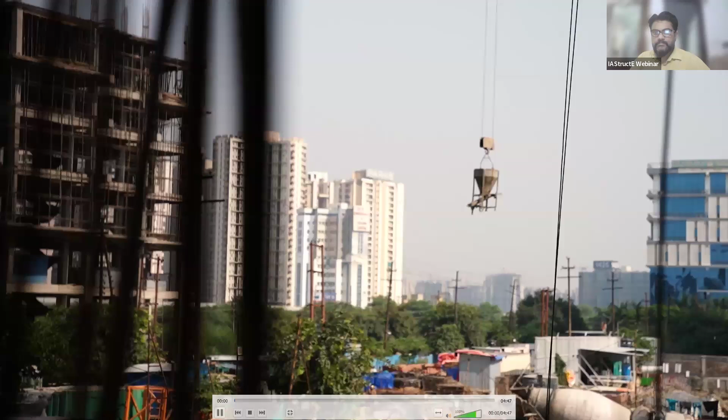The Indian Association of Structural Engineers, also known as IAStructE, was conceptualized and constituted in the year 2002 by a group of senior professional structural engineers from all over the country. IAStructE is registered under the Societies Registration Act 21 of 1860.

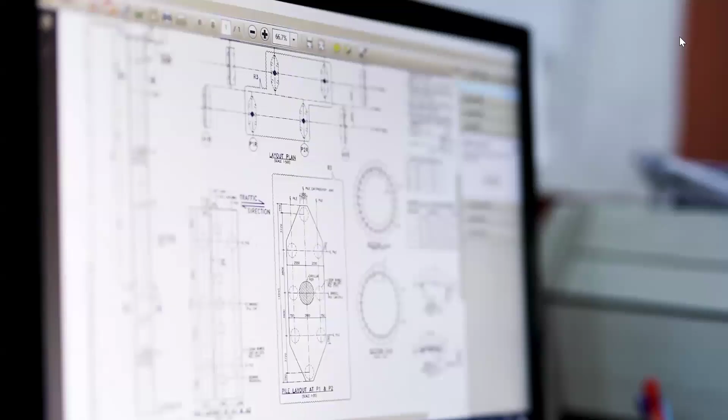IAStructE is a national apex body of structural engineers in India with a mission to promote the structural engineering profession and cater to the professional needs of the structural fraternity. In the short span of two decades, the association has attained an eminent position in the professional field. Its membership is valued very highly in the profession.

Since inception, IAStructE has been led by eminent structural engineers like late Shri Mahendra Raj, late Shri Kumar Ghosh, Shri Subhash Chand Mehrotra, Professor Mahesh Tandon, Shri Alok Bhaumik, Shri Manoj Mittal, and Professor R. Pradeep Kumar as its president.

IAStructE is a permanent member of the Engineering Council of India and interacts with the government on professional and policy matters related to civil and structural engineers. To expand its reach, IAStructE has collaboration with various international professional like-minded associations and institutions.

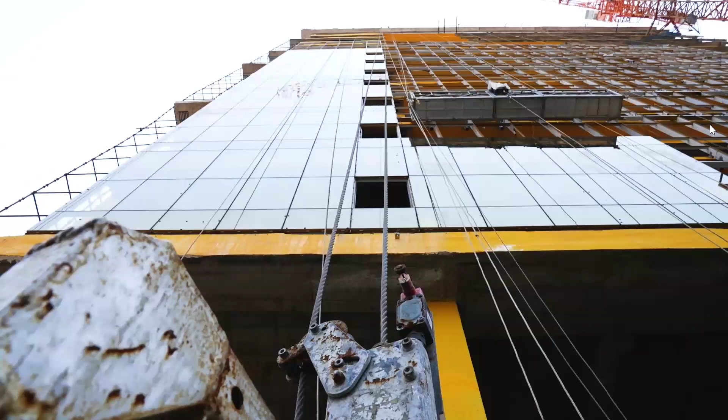IAStructE's prime objective is supporting and protecting the profession of structural engineering by upholding professional standards and acting as a mouthpiece for structural engineers in India. IAStructE endeavors to ensure that its members develop the necessary skills in structural engineering and work to the highest standards by maintaining a commitment to professional ethics and standards.

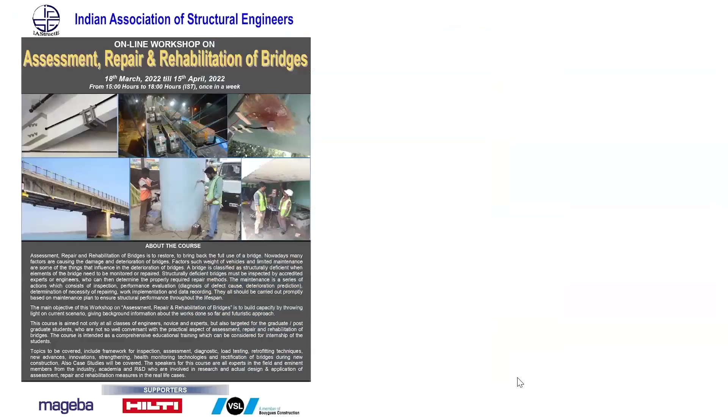IAStructE is actively engaged in organizing several continuing professional development courses for structural engineers to help them update their knowledge and advance their career paths. It also conducts refresher courses for young and practicing engineers, and student-oriented programs, seminars, workshops, conferences, technical lectures and discussions related to the latest technological advancements. Case studies are also organized regularly for members to enable them to continuously update their knowledge and skill set by interacting with the best minds from the industry.

IAStructE's activities are widely appreciated and known for quality technical content. IAStructE is also actively engaged in publishing its quarterly journal Structural Engineering Digest (SED), code commentaries, professional guidelines, and a monthly newsletter. IAStructE's publications are becoming popular with time.

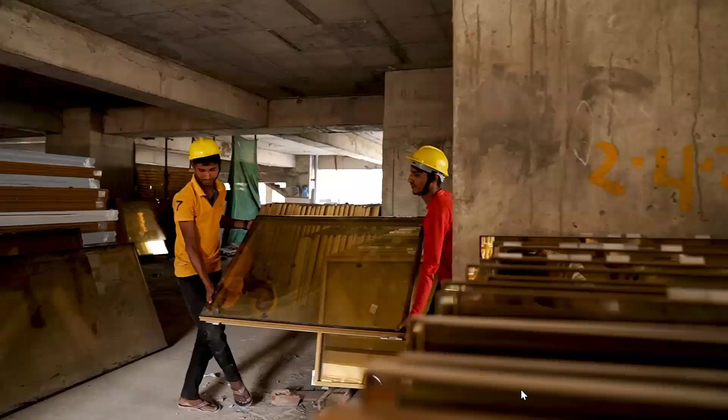IAStructE has representation in various technical committees of BIS and IRC as well. Its members are actively contributing to National Code Formulations.

In the year 2020, IAStructE started a National Awards competition to stimulate interest in the structural engineering field and to promote innovative thinking and creativity. The awards are presented to winners in recognition of their outstanding contribution to structural engineering in categories which include Outstanding Structure, Outstanding Structural Engineer, Outstanding Woman Structural Engineer, Promising Young Structural Engineer, and Best Master's Thesis in Structural Engineering.

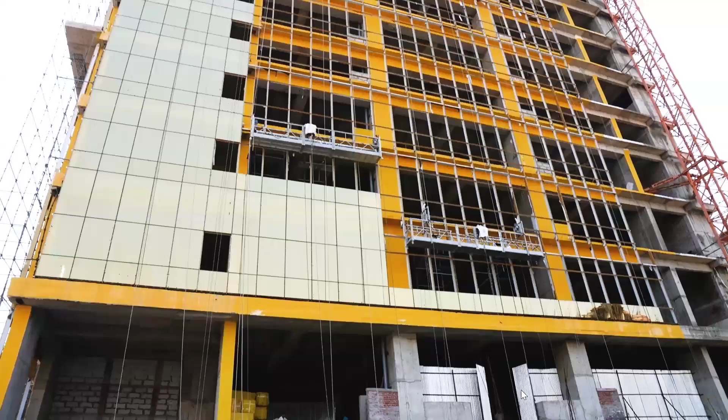IAStructE is currently operating from four regional centers, namely Eastern, Western, Northern, and Southern, having its headquarters in Delhi, to inculcate the professional culture and provide handholding to budding engineers. IAStructE has its student chapters in several leading engineering institutions as well.

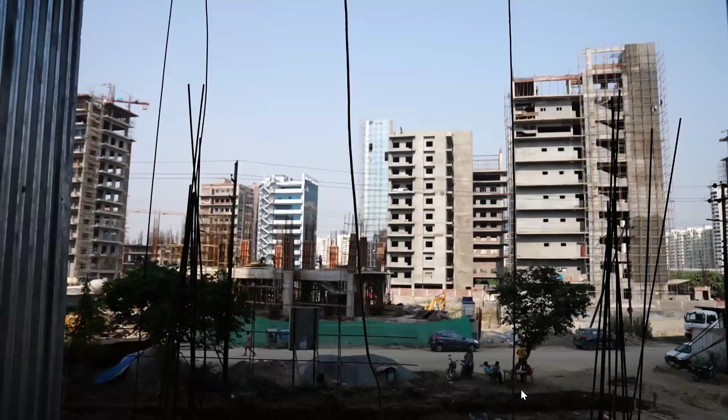Membership of IAStructE is open to all civil and structural engineers engaged in the structural engineering profession. Members are elected based on their qualifications and experience in different grades, as per eligibility requirements prescribed in the bylaws. Each application is carefully scrutinized before electing the members.

More information about IA Struct E is available on its website, www.iastructe.co.in.

Hello. Yes, sir. Yes, sir. Please start.

Okay, dear friends, welcome to the participants attending this webinar. Today's topic is essentials of effective waterproofing. The speaker is Engineer K.P. Abraham. On behalf of the association, I thank Engineer Abraham for sparing his valuable time, and he will talk on the topic essentials of effective waterproofing.

About the speaker, Engineer K.P. Abraham, former Chief Engineer CPWD, graduated in civil engineering from Kerala University and thereafter did his MTech from IIT Kanpur in structural engineering. He also holds a postgraduate diploma in management. After working for two years in Tata Steel, he joined CPWD in 1982.

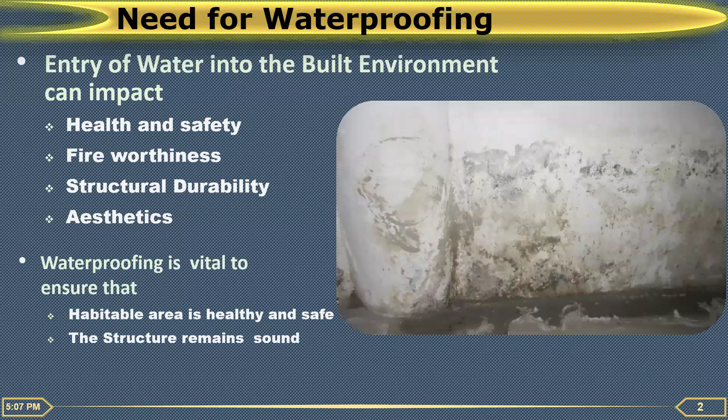So waterproofing is an essential element, and it is vital to make sure that your habitable area is healthy and safe, and the structure remains sound, and your architectural aesthetics is maintained throughout the life period or the service life of the building. And there are many avenues for the water to enter into the concrete.

You all know water is a material that looks for avenues to enter, and concrete offers a large number of avenues for water to enter. It can permeate through capillary pores in the concrete. It can enter through cracks in the concrete. It can enter through joints and discontinuities in the concrete. It can enter through insertions, which we normally make in any concrete construction.

And finally, it can enter through defects. Indian construction industry is famous for defects - could be honeycombs, surface defects, voids, it can be anything. So there are many ways for water to enter into the concrete.

First is the pores. Let us see one by one which are the avenues. When cement hydrates, two types of pores are created. One is gel pores, very small in size, which will not create water ingress or permeability. But the capillary pores, much higher in size, will certainly allow water to enter, and these capillary pores make the concrete permeable.

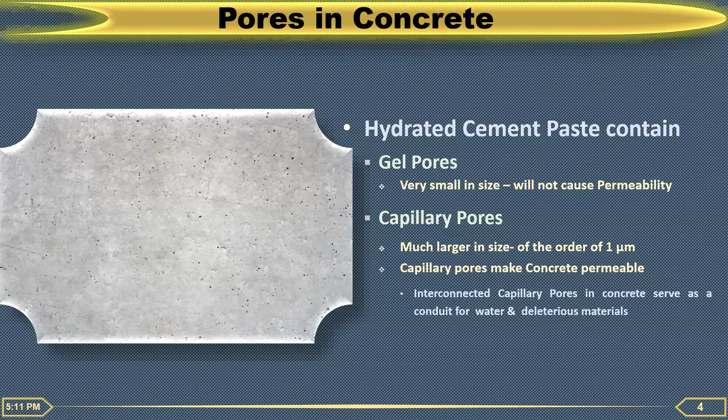And when the capillary pores are interconnected, they act as a conduit for water and deleterious material to enter into the concrete. The relation between porosity and permeability of concrete - as porosity increases, permeability increases, but it is not a straight relation. Its relation is a very interesting one.

On the horizontal side is the capillary porosity in percentage, that is the voids as a percentage of the concrete volume. Then the coefficient of permeability, which is the velocity or speed at which water can enter the medium. This relationship is somewhat like this: beyond a certain stage, the permeability increases drastically, increasing asymptotically.

Around 20% of the porosity, the concrete is practically impermeable - you can consider it as impermeable. But beyond 20%, once porosity increases, permeability drastically increases, and around 35%, the concrete is practically a porous material.

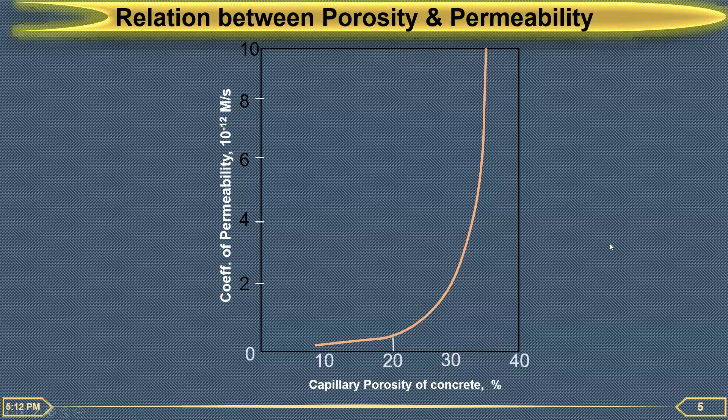Now, cracks in concrete. We all know why concrete cracks. Concrete cracks - it is an inherent nature of the concrete. We cannot avoid it, but we can certainly control it. It's an inherent property of the concrete to crack, and it cracks at all stages of its existence - it could be in plastic stage, hardening stage, or hardened stage.

So why does it crack at the hardened stage? Because concrete is a brittle material, and the tensile strength of concrete is very low compared to its compressive strength - we all know that. Whenever tensile stress develops in the concrete, and whenever it goes beyond the tensile strength of concrete, it cracks. This is why concrete cracks, and it's an inherent nature of concrete to crack.

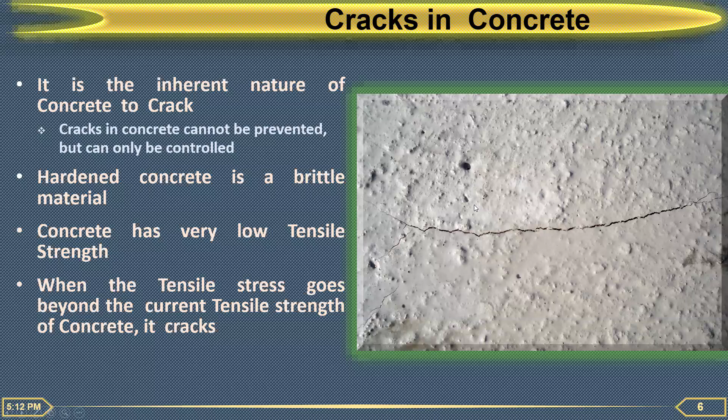Cracks in concrete can be many types, but basically we can categorize them into structural cracks and non-structural cracks. Structural cracks can be dealt with at the design stage itself - through proper detailing or proper design factors, or it can be taken into account by various methods. The designer can take care of it.

But non-structural cracks cannot be taken care of at the design stage - it has to be taken care of at the construction stage. There are many non-structural cracks that happen in concrete.

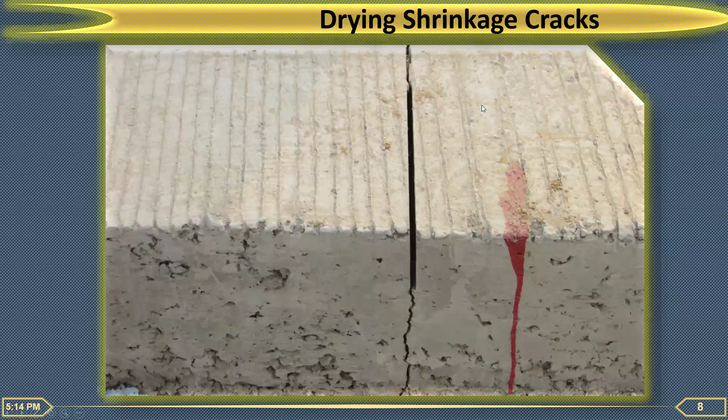The next category is the drying shrinkage cracks, and then thermal cracks. A typical drying shrinkage crack is a through and through crack - it will certainly allow water to enter into the structure. Thermal cracks are due to variation in the surrounding atmospheric temperature.

If the structure is allowed to move without any restraint, there is no crack. But all structures have some restraint or other always. So whenever the temperature goes down - it mainly happens when temperature goes down, not up - or when there is a temperature differential within the section, tensile stresses will be developed. This tensile stress will be proportional to the restrained strain - how much strain is restrained. And again, whenever the induced tensile stress goes beyond the tensile strength of concrete, it cracks.

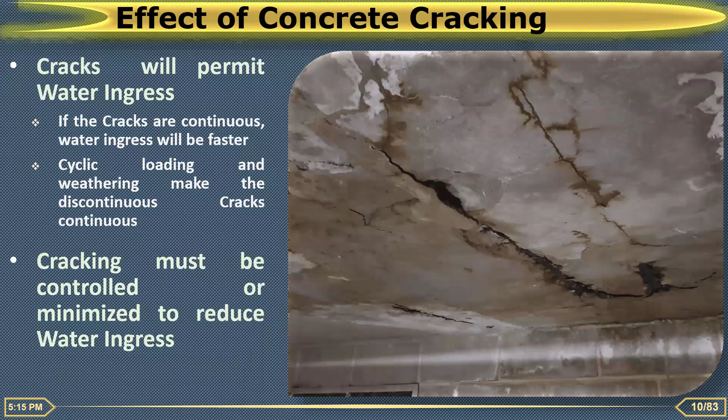Now, what is the effect of concrete cracking? Cracks will certainly permit water ingress, and if the crack is continuous, the ingress will be faster. Cyclic loading and weathering make discontinuous cracks continuous. So over time, be it weathering, loading, or fatigue, the crack will only widen once it develops. So cracks must be controlled or minimized to reduce water ingress into the structure.

Now, there are many joints in concrete. No major concrete can be done without joints. We know why we give the joints. Joints are given for different purposes, and there are many purposes for which joints are given.

First of all, we have contraction joints. This is to take care of the contraction while setting and hardening. Then we have construction joints. No concrete can be done continuously. Somewhere or other, we have to stop, and when we restart after its final setting time, a cold joint will be developed. That is a construction joint.

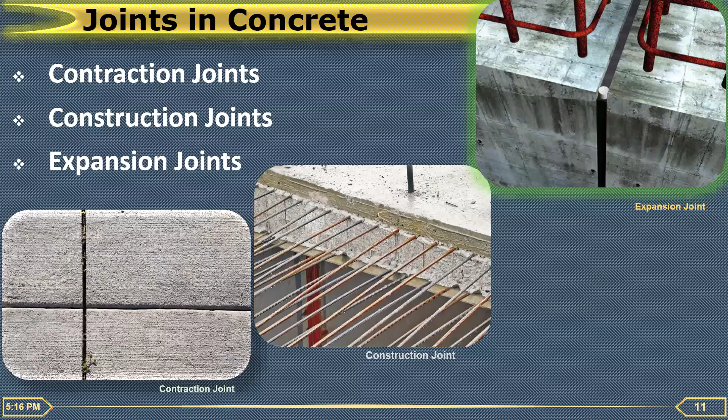Then, of course, there will be expansion joints. No major structure can be done without joints. These joints are required not only for thermal expansion, but also to take care of the seismic behavior of the structure. So all the joints in a structure have to be treated to prevent the ingress of water into the built environment.

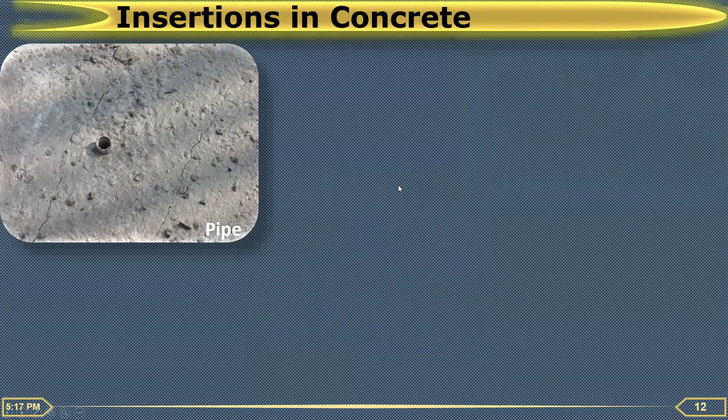Now we do a lot of insertions in concrete. No major concrete is done without insertion. There could be pipes—you can see the pipe inserted here. There could be sleeves inserted into the concrete, and you can see a hole here. And it's a very interesting thing—a hole is made in the raft, and the raft is...

...against the water thrust. The water table is very high. And you can just imagine, whatever treatment you give below the raft, if this cutout is not treated, it is going to leak somewhere or the other. That is the criticality of this type of insertion and cutouts.

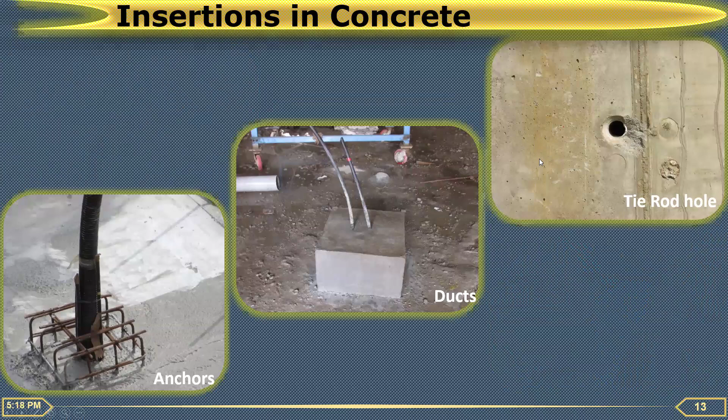Now we put anchors into the concrete, we put ducts into the concrete. You see it's a tie rod hole. This is basically provided for retaining the shutter at the concreting stage. All this creates subsequent leakages if not properly treated.

Now, let us see what are the reasons for failure of waterproofing treatments. With all the care we take, still it fails. What are the reasons? What could be the reasons?

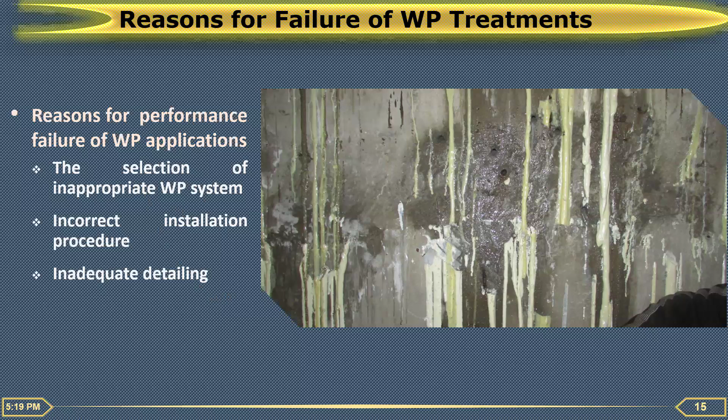So let us come to what are the essential requirements to make your waterproofing successful or effective. I will go one by one.

First of all, ensure high performance of the concrete against water ingress. Make sure that your concrete is high performance against water ingress.

Then select an appropriate waterproofing system. It's very important. A wrong system will lead you to a lot of problems and headache at a subsequent date.

Then, of course, your applicator should be competent and experienced. An incompetent applicator can spoil the whole thing.

And finally, test the completed waterproofing, which we never do. We only test the components or a part of it. We never test it after installation as a completed waterproofing. This is also very important. These are the factors we have to consider to make your waterproofing good.

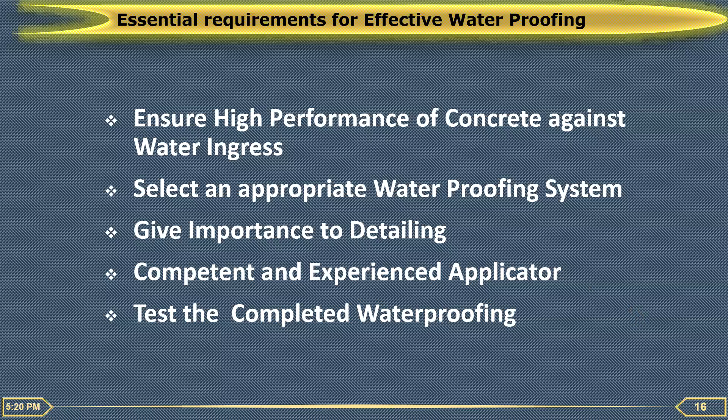I will elaborate some of this situation to make it more clear. First of all, let me explain the importance of selecting an appropriate waterproofing system. This is one of the crucial aspects in the success of waterproofing of the building.

I'll explain the need for selecting an appropriate waterproofing system with the system we adopted for this particular project. So this is a huge complex. It has got 3 basements covering the entire buildable area, and it is very near to River Yamuna, and the water table is very high.

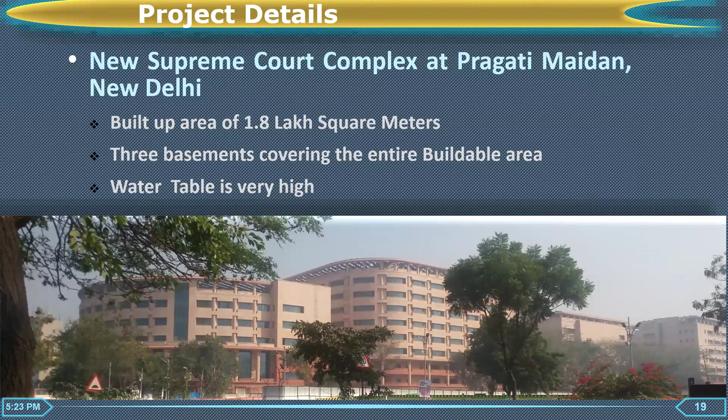The raft level is around 15 meters below ground level. Water table is about 2.5 meters below ground level. You can imagine the building is subjected to an upward thrust of 12.5 meters of water head throughout its life period. So we had to be careful in planning and executing the waterproofing treatment of such a structure. Moreover, you can understand the implication of failure here.

This is the details. The basement is here. This basement covers the entire buildable area permitted for the plot. Over that, different blocks and different towers exist. Wherever towers are not existing, they are used as a podium, maybe for parking or for garden.

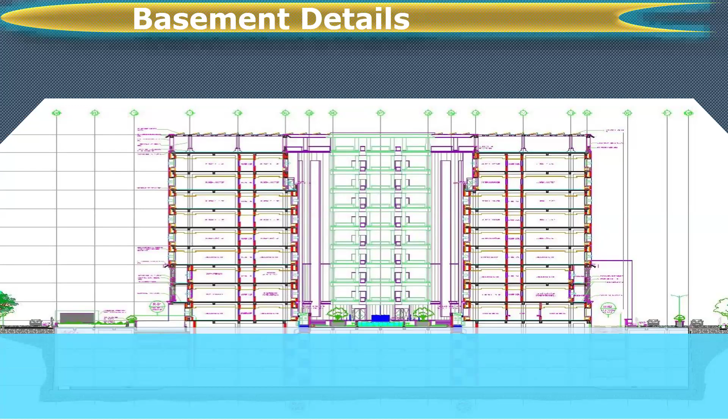So water table is practically near the ground, say around 2 or 2.5 meters below ground level. This basement has to be treated effectively so that subsequently there should not be any major headache or problems. This basement, in addition to parking, has all vital installations of the structure - be it electrical installations, firefighting installations, or air conditioning plants - all require an absolutely dry surface for proper upkeep and maintenance.

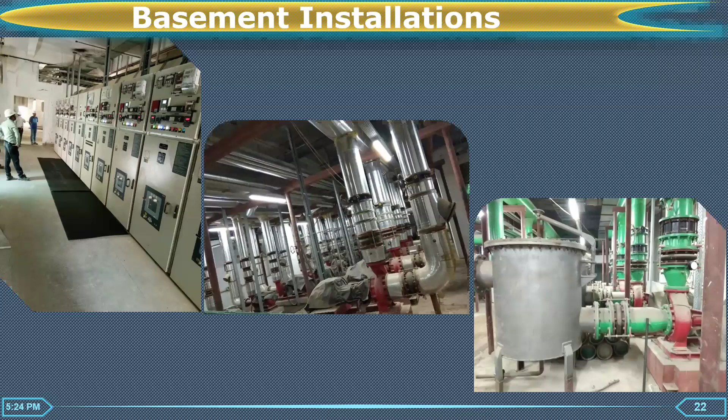And the problem is complicated by the presence of soil anchors. There is an uplift of 12.5 meter head of water throughout the life of the structure, and the building has to be held down against buoyancy. Soil anchors are provided to hold down the structure against buoyancy, against the uplift forces.

So we have provided soil anchors of different capacity. The spacing was provided differently - at the tower area, the spacing was more; in the non-tower area, it is closer because the effective uplift will be more in the non-tower area. Note that these soil anchors pass through the raft, meaning it punctures through the raft, and these are prestressed and anchored at the top of the raft.

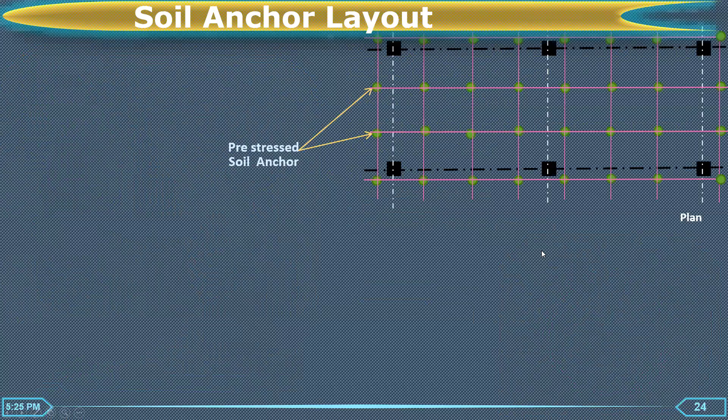What was initially considered as the waterproofing system is the typical Kota stone system, a traditional system we adopt mainly in Delhi and surrounding areas. It has withstood the test of time and in most cases worked well. I am not finding any fault with this system. Many important buildings were provided with this Kota system.

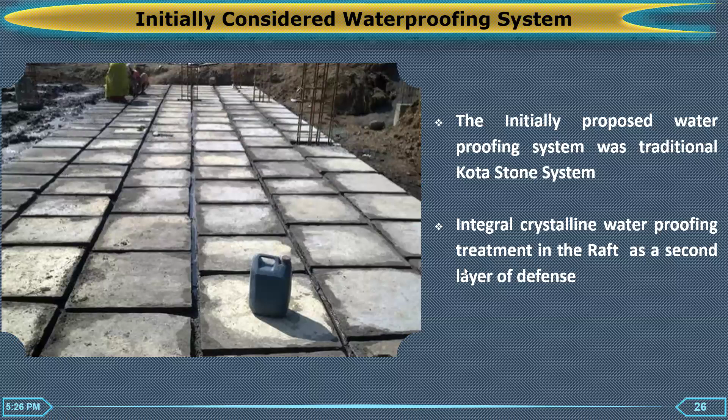As a second layer of defense, crystalline waterproofing treatment was given to the raft, so that there's something to resist even if the Kota stone fails. This is the initially considered waterproofing system for the project.

But we made an analysis of whether it will work, whether it can create any problems. First of all, we observed that Kota stone is a rigid system, like any stone is rigid. There is a very possibility that the stone will crack or the joints will crack while stressing the soil anchors, so every possibility is that it gets cracked. Once the Kota stone is cracked or the joint is cracked, this treatment is of no use.

Secondly, it's a vast area of the raft, covering more than 8 acres of land, and there could possibly be local settlement of soil below the raft. If a local settlement happens, the Kota stone will detach or separate from the bottom of the raft, again allowing water to enter. It can travel vertically through the raft or horizontally between the raft and the stone, leading to leakage somewhere else, and at a subsequent date it is very difficult to know the source of the leakage.

And finally, the soil anchor and raft interface will be extremely difficult to waterproof with the Kota stone. We cannot make a foolproof waterproofing treatment of the interface of the soil anchor and the raft.

So we evaluated the requirements for a successful waterproofing system here. First of all, the material should be flexible; it should not crack under the pre-stressing load of soil anchors, the prime criteria. Secondly, it should not separate from the structural concrete in the event of a local settlement of the soil. It should stick to the raft.

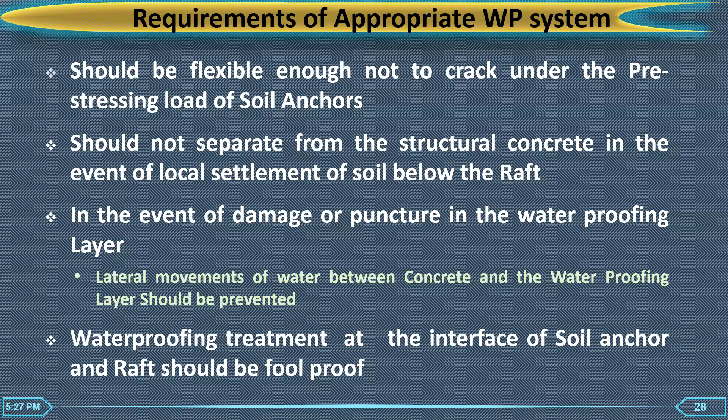Thirdly, in the event of damage or puncture of the material, any layer or sheet can get damaged or punctured while laying it. In that event, water should not travel laterally between the concrete and the waterproofing layer. They should not allow movement of water at the interface of concrete and the sheet. And finally, the waterproofing treatment at the interface of soil anchor and raft should be foolproof. We should get a foolproof system of waterproofing the interface of the anchorage.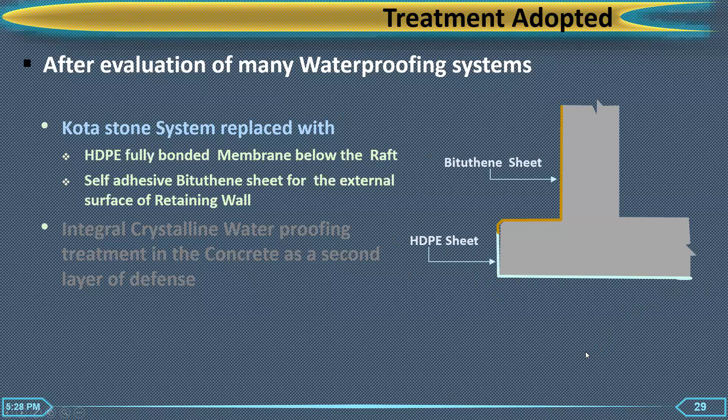So after evaluation of many waterproofing systems, we finally decided to replace the Kota stone system with an HDPE fully bonded membrane below the raft and a self-adhesive Bituthene sheet on the external face of the retaining wall. You can see here the HDPE sheet is provided below the raft and Bituthene sheet is provided on the vertical side. And as a second layer of defense, we retained the integral crystalline waterproofing treatment in the concrete of the raft.

This is what we finally adopted. These are the details here. The HDPE fully bonded sheet can be easily creased or bent 90 degrees without damage to the vertical face, so that there is no discontinuity at the corner.

On the vertical face, we are given a thin sheet which properly overlaps at the vertical face of the raft. This HDPE sheet has an interesting behavior: it has a pressure sensitive adhesive which bonds integrally with the concrete poured over it. That was a great advantage for us. Once it is bonded, lateral movement of water can be certainly avoided.

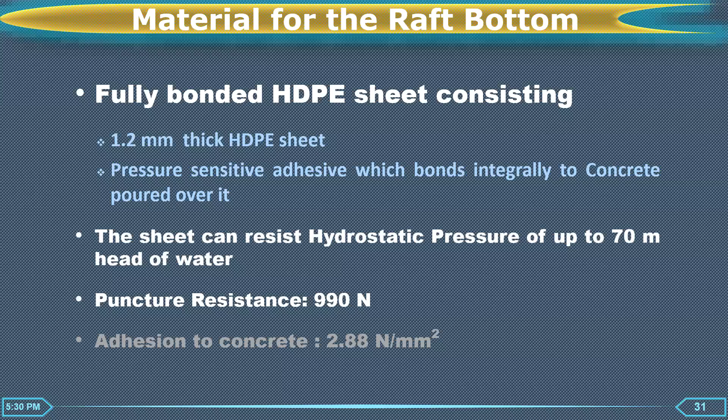Then it has other major technical parameters provided by the manufacturers. Initially, we were also apprehensive about whether green concrete placed over the sheet would really bond with the sheet.

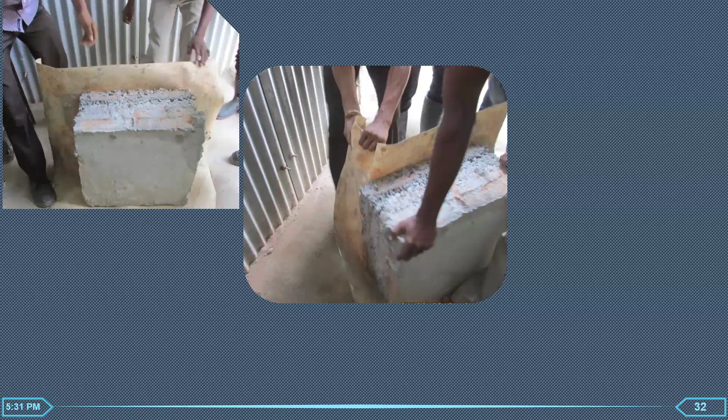No testing parameters were available a few years back, so as our own interest, we made a cube over the sheet. After curing and hardening, we tried to detach the sheet, and certainly with manual labor it was not possible to detach it, showing that there is enough bonding between the concrete and the sheet, so that the horizontal transmission of water could be avoided.

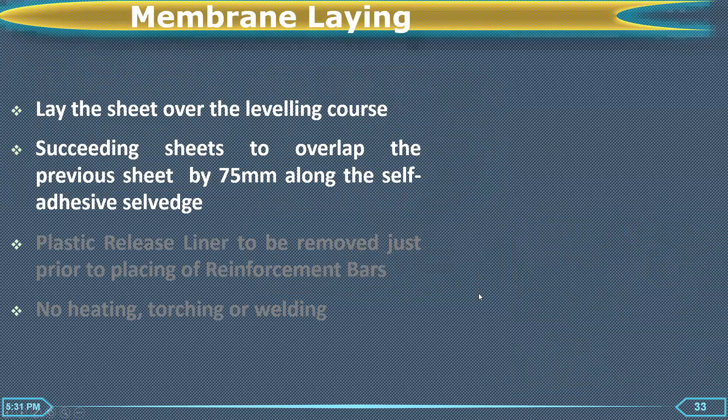The laying was also comparatively easy. It is laid over the leveling course, that is lean concrete. The sheets are laid with an overlap of 75 mm, and after laying, a plastic release liner is removed and the reinforcement is placed over that. You can see the overlap of the sheets. Here the main advantage was that there is no heating, no torching, no welding - it is only simply laying and sealing the joints.

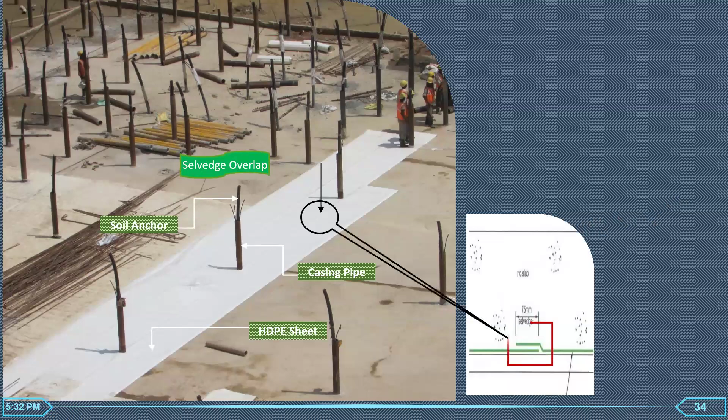You can see how this overlap is made - just by pressing a roller, this joint is ready. But the cross joint is a non-selvedge joint, so we had to provide an additional tape to get a proper joint. You can see here an additional tape is provided at this point.

Now you can see the photograph, with the casing pipe within the thickness of the raft, then the soil anchor. This interface has to be properly treated, otherwise there could be every possibility of water entering into the built environment through this interface. So what we have done is very interesting, how the detailing was worked out and how it was properly treated. This is what I'm going to explain here.

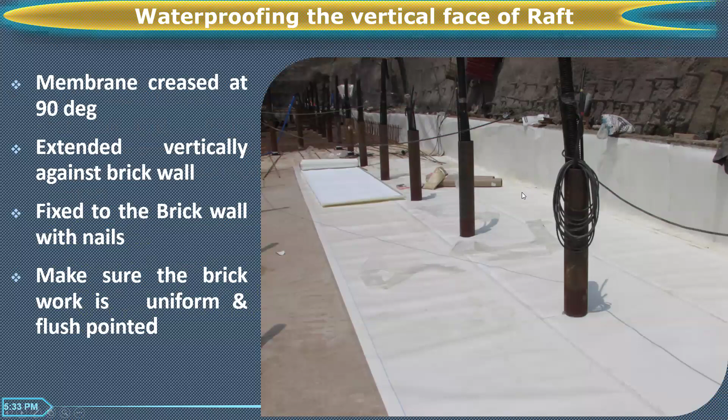You can see here the sheet - the white one is the sheet waterproofing layer, the HDPE sheet, and the black one is the pipe, the casing pipe. Wherever the casing pipe passed through the sheet, there is a profile cut - the sheet is profile cut at this joint. So this sheet is laid and extended on the vertical surface also without any discontinuity at the corner. Similarly, at the vertical face of the retaining wall, the Bituthene sheet is provided, which is also self-adhesive.

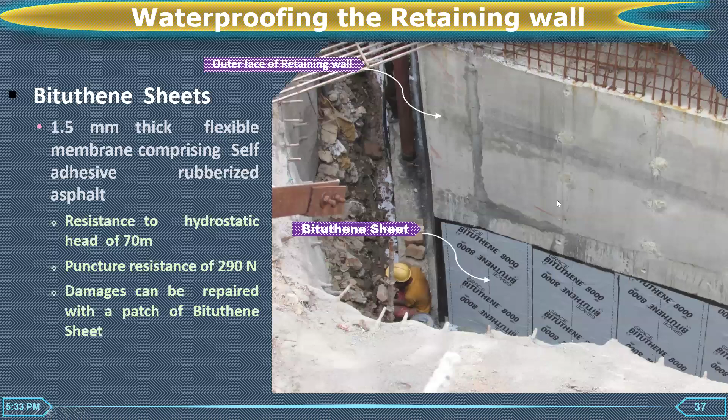Now we have seen the importance of selecting an appropriate system. Let us see the importance of detailing, how the detailing has to be worked out to make sure that your waterproofing is really 100% sure it will not fail. I will elaborate with the same project, the new complex of the Supreme Court at Pragati Maidan.

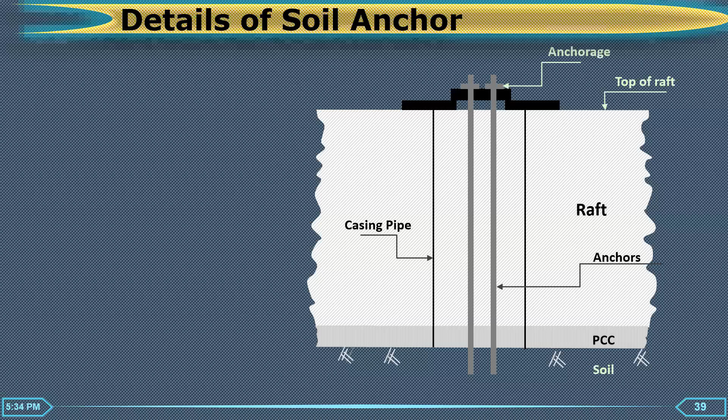Now, what are the probable water entries? Before detailing out, we have to see what are the probable water entries in this interface. First of all, water can enter through the cement grout. Secondly, water can enter through this joint where the casing pipe and the waterproofing sheet meets - this is a very vulnerable joint where water can easily enter. And thirdly, it can enter through the interface of concrete and the casing pipes.

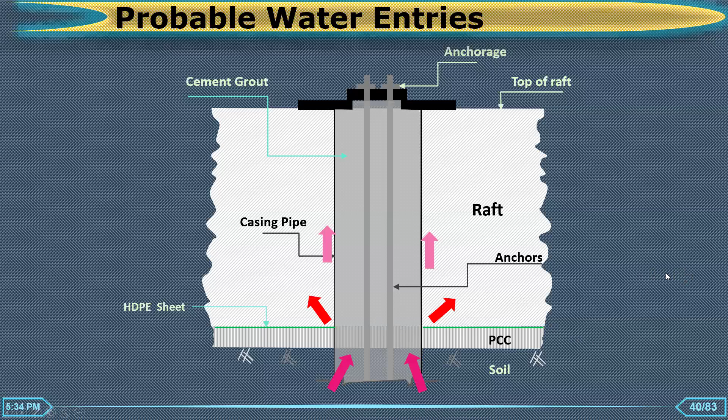So all these points have to be detailed out to best prevent water movement within the raft. So the areas to be treated are the grout, the corners, and the interface of the pipes. This has to be detailed and treated.

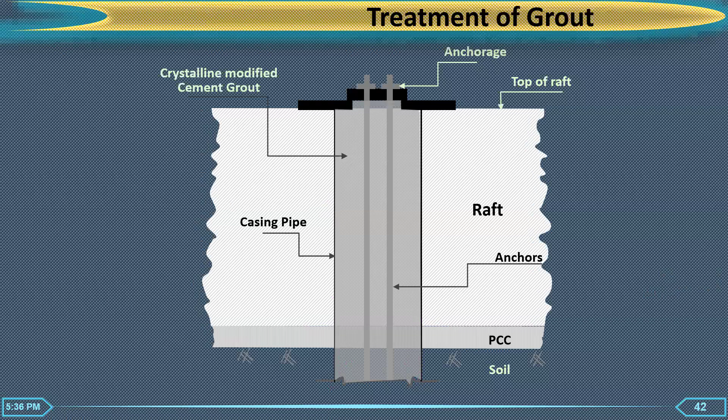Now let us see how to take care of the grout. So what we have done is provide a crystalline modified grout which prevents any water entry through the grout - that's the first blockage. Secondly, the joint - you can see the casing pipe here, you see the layout, the casing pipes are here.

And there is a joint. There is a profile cut at the junction where the casing pipe meets the sheet. So this junction has to be treated.

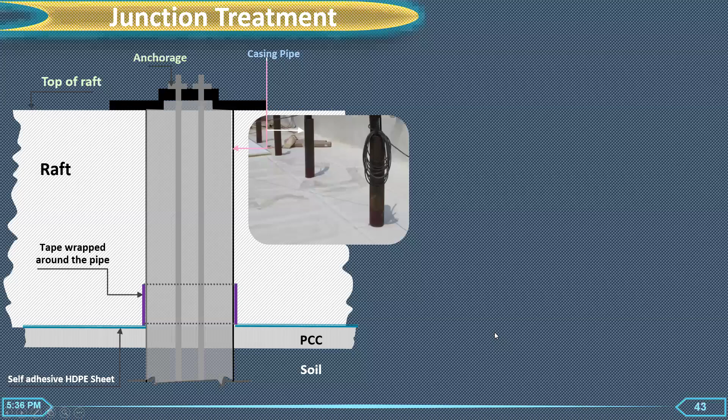First of all, we have wrapped a tape around this one. You can see this one, it is wrapped. This is not tape what we are seeing, it is a protective cover. Once the protective cover is removed, you can see the tape here. And this tape is also self-adhesive, so that this concrete can stick to this tape.

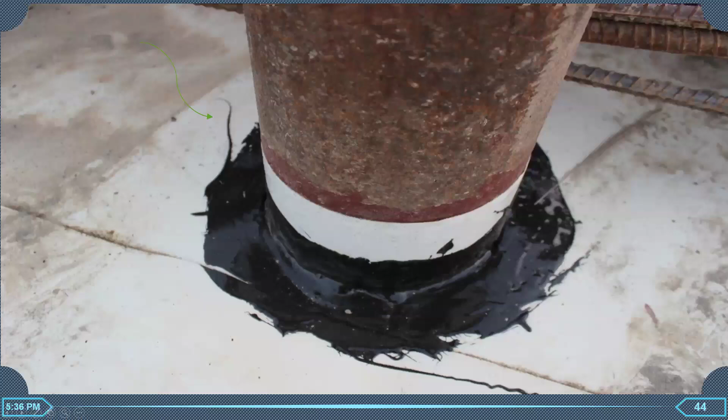Then the joint between the tape and the sheet is treated using a liquid applied membrane. We seal that joint, meaning there is absolutely no chance for water to enter. That completes the detailing of the joint. You can see the detail here: casing pipe, the tape wrapped around the pipe, and the liquid membrane. So 3 layers of treatment are provided to make sure this won't leak. You can see the overall view of these junctions, each identified, detailed out, and treated.

Now, the third one is interface. At the interface also water can enter, there's a possibility. So what we have done is a hydro swellable water stopper is provided at the midpoint of this one, so that water will not go beyond this level at any case.

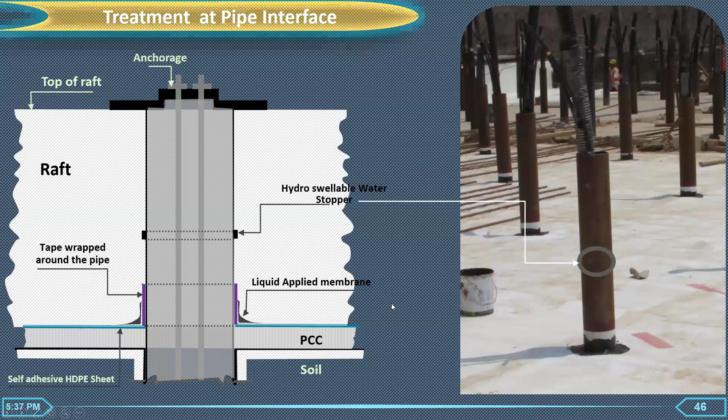Now, numerous construction joints are there in the raft and the retaining wall, and all these construction joints have to be identified and treated. Otherwise, there's no guarantee that your waterproofing will be effective.

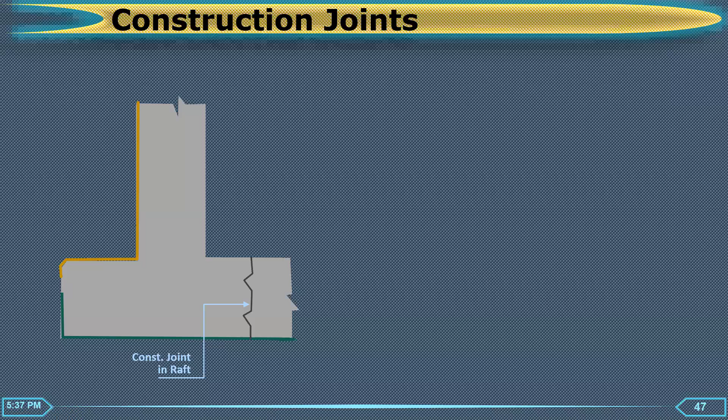The vast area of the raft will have hundreds of construction joints. Similarly, there will be numerous construction joints in the retaining wall, which are all vulnerable points for water to enter. So what we have done is at the construction joint, you can see casting 1, and after some days, we do casting 2. Before casting 2 is done, we insert a hydro swellable water stopper and then do the casting.

So even if water by chance enters through this joint, it will be stopped at the hydro swellable water stopper locations. Similarly, in the retaining wall, at the middle of the joint, hydro swellable water stop is provided.

This hydro swellable water stop behaves somewhat this way: it expands when it comes into contact with water. In dry condition, it may not swell. So when it swells, expansive forces form against the concrete faces, and this expansive force makes a seal against hydrostatic pressure, stopping further water movement. It's a very plastic, malleable material, easy to put over any surface of concrete.

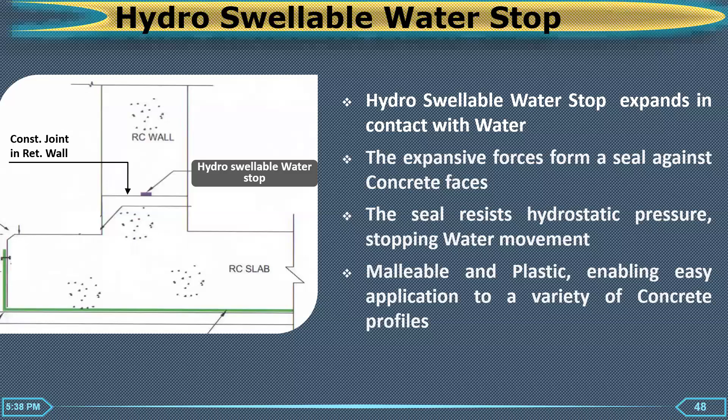It comes in strips. You can see the photograph here. The concrete has to be thoroughly cleaned and all spatter and nibs removed. Then you put a primer there, place the material, and press with your thumb to firmly put it in place. That's all, cut to place. You can see one of the construction joints where this hydro swellable bar is placed.

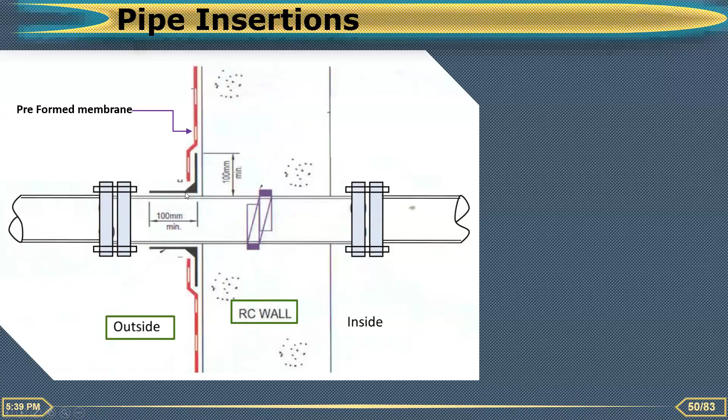Then pipe insertion - as I told, all major construction will have a lot of insertions. A typical pipe insertion is shown here in an RCC retaining wall. You can see the RC wall, outside, where treatments are given, preformed membranes are given. Wherever the pipe inserts, there is a puncture or discontinuity in the sheet. So what we have done is, at such points, liquid applied membranes are provided to seal the joint, and as an additional precaution, hydro swellable water stops are provided at the middle. You can see a photograph - the blue one is the hydro swellable water bar in the construction joint and also around the pipe.

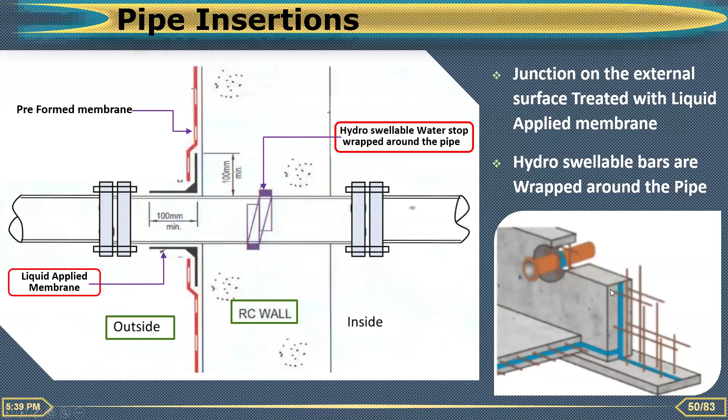So what we have done is these holes are filled with crystalline modified mortar. And in addition, as a precautionary measure, 2 coats of crystalline modified slurry are provided both inside and outside to make sure there is absolutely no chance for water to enter.

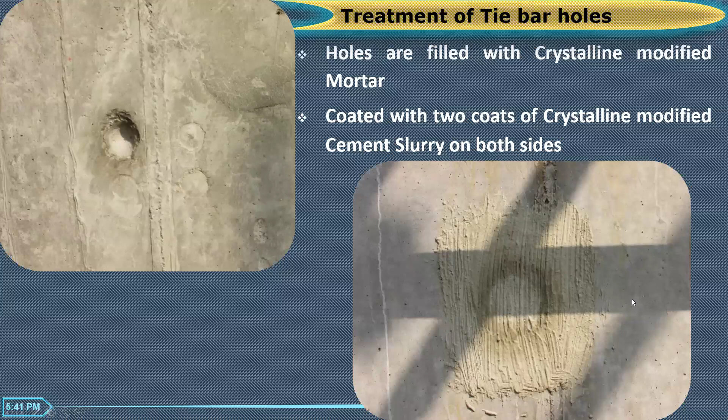The next factor you have to complete is the experience of the applicator. The applicator should be experienced in the particular system of application. If the system differs, it could be of no use. So you have to thoroughly evaluate the competency and experience of the applicator, especially for major works for carrying out the waterproofing works.

First, ask for similar works and experience with similar technology executed by the applicator. We can always get feedback from clients who have had similar works executed. We can verify the training undergone and certification earned by the applicator. One important parameter is to check the track record regarding fulfillment of waterproofing contracts, performance guarantee claims, and especially his performance in rectification of defects subsequently.

Another important thing is that all waterproofing work should be supervised by an experienced and qualified engineer or supervisor. Most waterproofing subcontractors send their labor and do the work, which should not be permitted. There should be constant and continuous supervision by a qualified supervisor. We have to make sure that it's supervised.

The next aspect is testing after completion. Very few projects do this because it is cumbersome to test after completion. We require a lot of water, it has to be retained for a few days, and after retaining, the water has to be thrown out. Because of this difficulty, most of us do not carry out testing of the completed waterproof system in all respects.

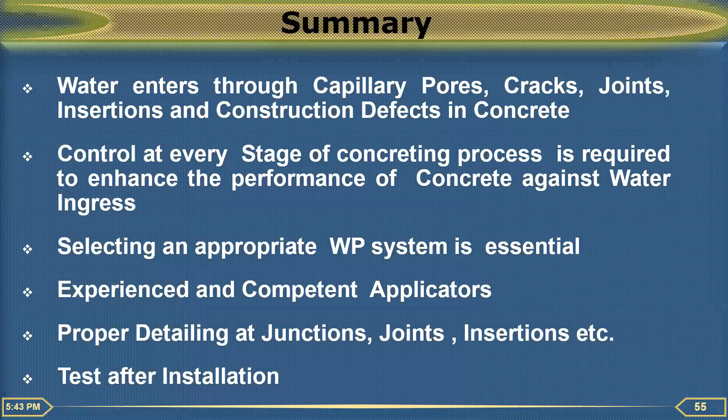So let me come to the second part of the presentation. I will also cover some of the waterproofing technologies available so that you can make an informed choice while selecting the system for your particular requirement. I'll give an overview of the present day, state-of-the-art waterproofing technologies available.

Conventionally, we all know we go for conventional systems like Kota stone or brick bat coba, lime terracing, bitumen application. Bitumen application is quite common. But with the advancement of polymer technology, we have got a host of modern waterproofing systems. Some of them I will be explaining in the subsequent slides.

Modern waterproofing systems are basically classified into 4 or 5 categories, as you can see in the list here. First is the integral waterproofing system. Integral means it becomes integral with the concrete, which is why it's called the integral waterproofing system.

Then we have coating and liquid applied membrane systems. Then we have preformed membrane systems, which means sheets like HDPE or PVC sheets. Then we have another system called impregnation systems, which I will explain subsequently. And of course, we all know grouting systems. Grouting is mainly used for existing buildings, for existing defect rectification. But all the other four can be utilized either for a new application system or for existing leakage rectification.

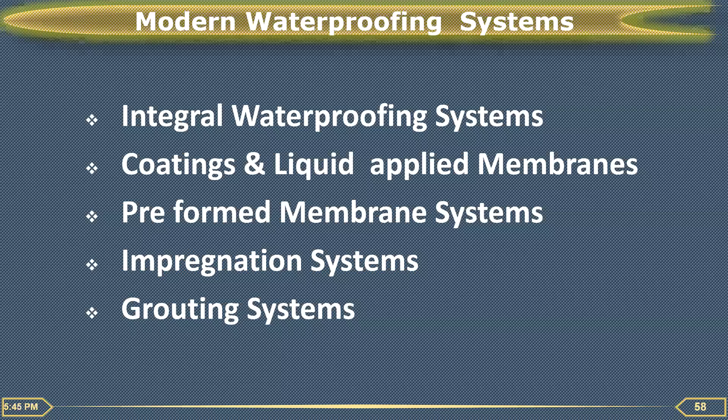Now, come to the integral waterproofing systems. I will explain. It is integral because it is integral with the concrete. They are added to the concrete during mixing. Different types of integral waterproofing compounds are available.

There can be water repellent, air entraining, or crystalline compounds. Many types of integral waterproofing compounds are available. Basically, what they do is they make the concrete impermeable. That means they fill up the gaps and micro cracks. This is what they do.

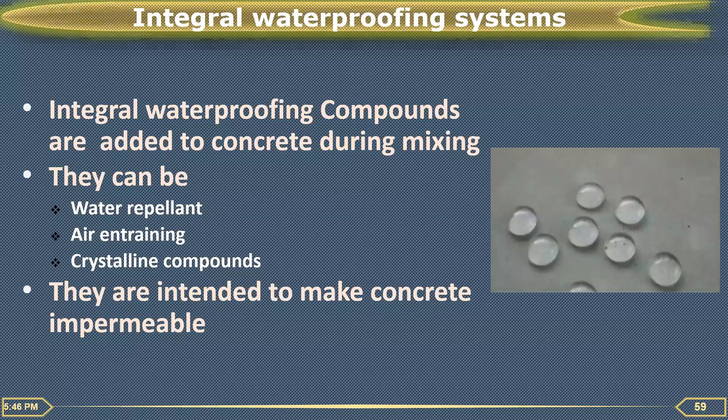Out of this integral, crystalline waterproofing is very popular. What these crystalline compounds do is they form insoluble crystals in combination with water, and this crystal plugs the pores and micro cracks of concrete.

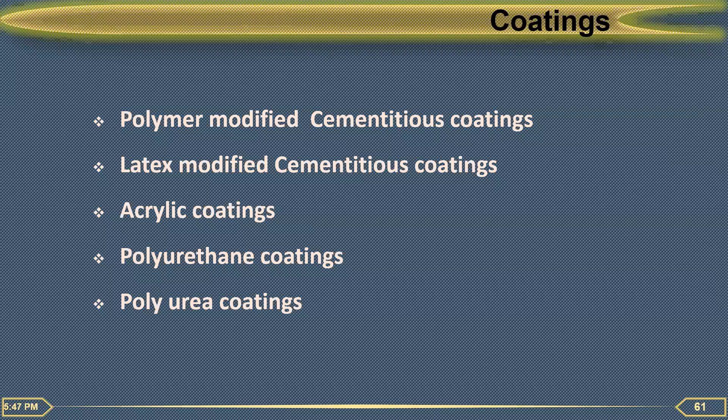Then we have got coating systems. This is another useful method of waterproofing. There are many coating systems available - cementitious coatings, modified cementitious coatings, acrylic coatings, polyurethane coatings, polyurea coatings. A large number of coatings are available to treat water leakages.

So before going into details, we should understand what are the essential main requirements of a good coating system - what it should satisfy so that this coating system will be successful against water leakage.

First of all, the material part. The material should possess an excellent bond with the substrate. That means it should bond with the concrete. It should not detach, it should not come out.

And second, a very important aspect is it should be breathable. Breathable means it should allow water vapor from inside to outside, not the other way. You can just imagine your skin can breathe - it can send out water particles or sweat, but it cannot take water inside. So it is something like this.

If water vapors are accumulated within the concrete or within the interface between the concrete and the coating system, it will create bubbles, it will come out, it will detach, and once it is detached, it will be of no use. Secondly, it should at least bridge micro cracks, not crack with the cracks.

It should elongate and recover when exposed to cyclic stresses. That means for fatigue or cyclic stresses, it should move and come back. And of course, it should be durable - it should stand as durable as the building. And environmental consideration should have limited or no VOC.

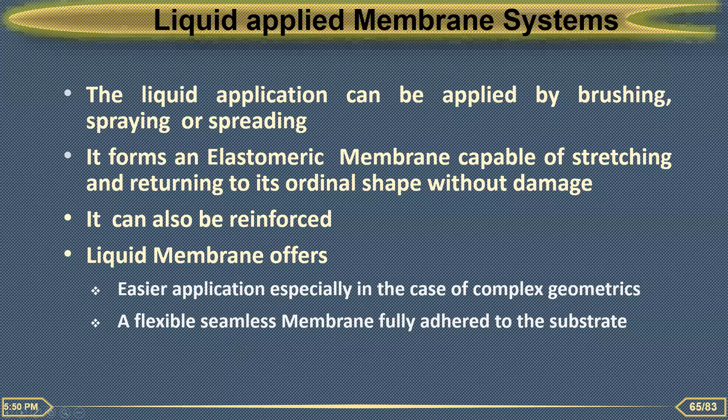Now the other major system is preformed membranes. We are all aware of these preformed membranes of different categories. We know conventionally, age-old, bitumens were used as membranes. We are all familiar with bitumen membranes, but bitumen has got a problem.

It has got great waterproofing property, but its mechanical property depends on temperature. All its physical properties change with temperature - it becomes brittle at sub-zero temperature, it turns viscous at elevated temperature, and at moderate temperature it is a viscoelastic solid. So it is a material where its tensile strength, breaking strain, elasticity, all change widely through the normal cycle of temperature.

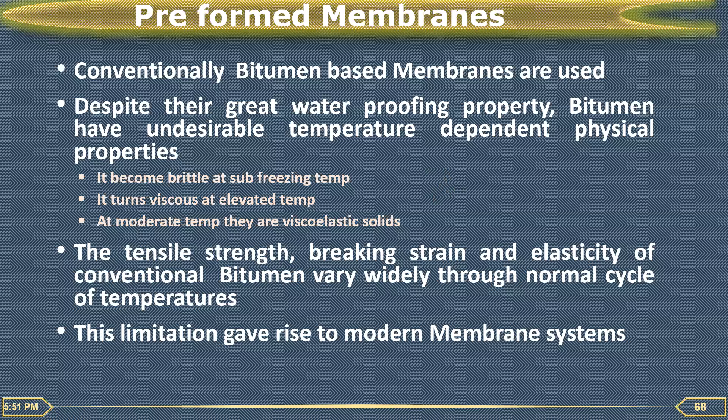So this limitation gave rise to modern membrane systems. And we have got Hessian reinforced tar felt. Almost 50 years back, it was in the market, and it was very widely used for waterproofing treatments. In fact, over a period, tar felt became a generic name for all the felts - all the felts we used to call tar felt. Then EPDM and neoprene membranes came in the early 80s.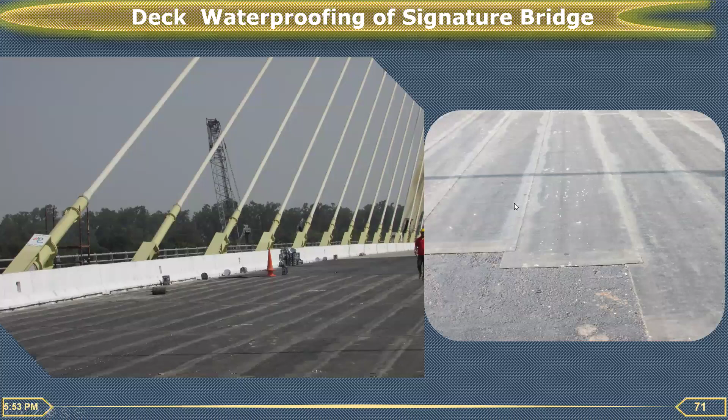PVC membranes are available in different forms: UV resistant or non-UV resistant, fire resistant or non-fire resistant, reinforced or non-reinforced, all available in the market. Similarly, we have HDPE membranes available, with two popular forms. One is the self-adhesive membrane, which we can stick to and pour concrete over. The other is mechanically bonded type. Both are extensively used. Then we have TPO membranes, which combine the properties of EPDM and PVC.

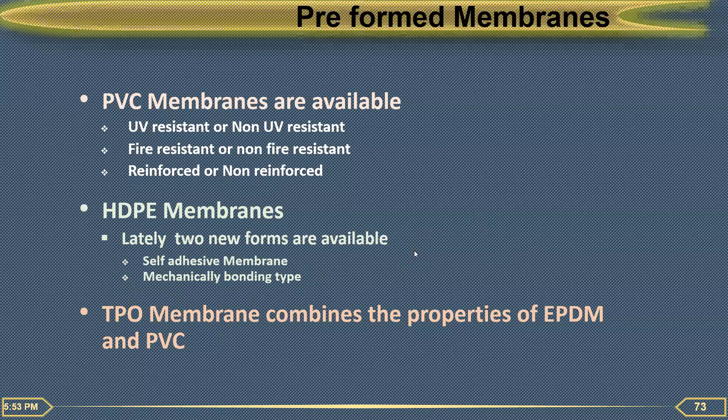Then the next system is the impregnation system. This is different from coating. Coating works by adhesion, meaning it sticks to the surface, whereas impregnation diffuses into the structure and becomes an integral part of it. So here the effect is basically because of the physical diffusion of the chemical and the chemical reaction.

The penetrative and reactive chemical is applied on a cementitious substrate. It diffuses into concrete and blocks the pores and micro cracks. The proven technologies as of today are organosilane technology and crystalline technology.

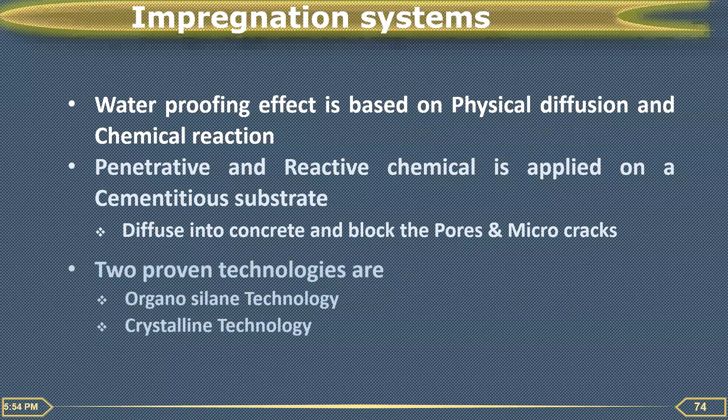Organosilane technology is a very commonly used method. It is water dilutable, easy to apply, and has a long service life. Another advantage is that it is eco-friendly. Its molecular size is very small, so it can even penetrate micro cracks and nanocapillaries. The only thing is it has to be applied fresh on the concrete surface without giving any coat, because once you give the coat, it cannot diffuse into the concrete.

Crystalline impregnation is also very important. We have seen how crystalline technology is used as a material added to the concrete. Here, it can be used as an impregnation technology also. Crystalline chemicals use water as a medium to migrate into the concrete. Once inside, they react with the lime, calcium hydroxide, resulting in insoluble crystalline structures, which I explained previously. These crystals will fill up pores and micro cracks.

It can be applied to the existing concrete surface or over fresh concrete as a dry shake application.

Are you telling something? I will take 2 more minutes.

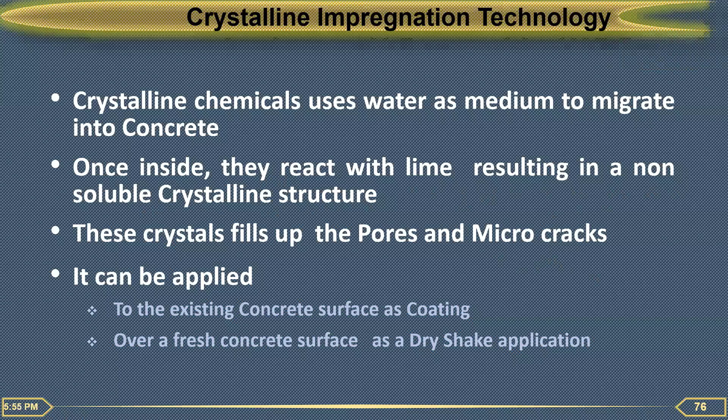It can be applied by brush application, spray application, or dry shake application over the green or partially setting concrete.

Then grouting systems, as I told you, are mainly used for existing structures where there are cracks, honeycombs, porosity, voids, cavities. In all such situations we resort to grouting systems. Make sure the grout is flowable. It should be non-shrink and remain stable without cracking or crumbling.

Popular grouting systems are cementitious grouting, as we all know, then polymer grouting system, and popular ones are epoxy and polyurethane grouts.

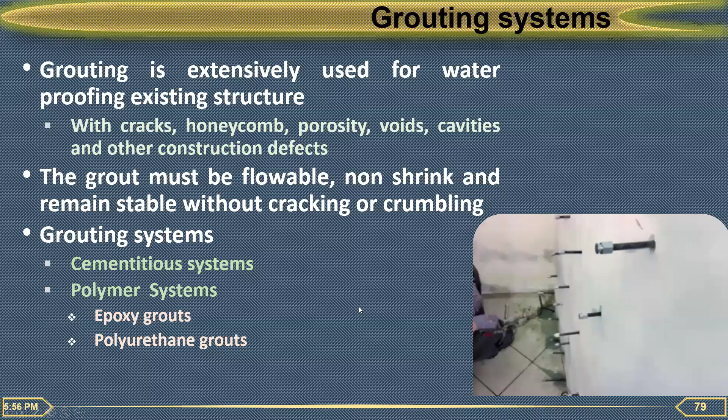Cementitious grout is still the most popular one because it is readily available, cheapest, and compatible with many surface and substrate conditions. But it can be resorted to only when the cracks are dormant. If the cracks are expanding or widening, it's of no use, and it's especially useful for large voids and honeycombing. This grout uses admixtures to impart non-shrinkable properties and improve flowability.

Then we have ultra fine grouts, which can be used for micro cracks and gaps that cannot usually be grouted by cement grout.

Then epoxy grouts are very popular. Again, they are non-shrink, flowable. They have excellent bonding with almost all materials, good chemical resistance, and are effective in sealing micro cracks. But again, if the cracks are stable, then only will it be effective. Negative points are low pot life, non-resistance to ultraviolet exposure, and high temperature. It is not good for high temperatures, and of course, it is not an environmentally friendly material.

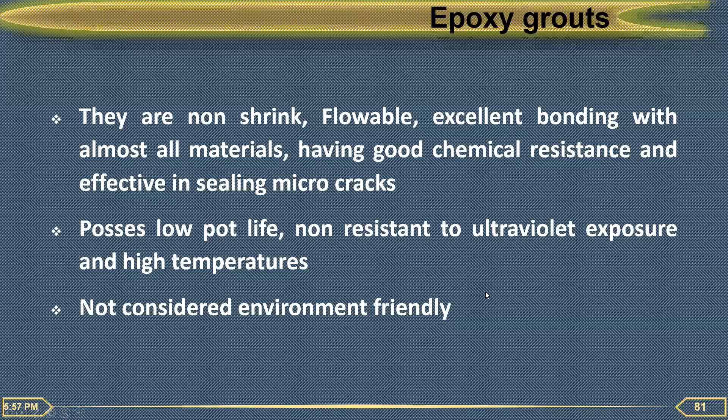Then polyurethane grouts are also getting popular.

Its main advantage is that its low viscosity allows it to penetrate into micro cracks. It is environmentally inert, but the costs are high.

If grouting is not possible, or the concrete is so weak that grouting will not be successful, they can think about curtain grouting also. When injection grouting is not possible in concrete, for curtain grouting what we do is grout beyond the concrete. That means you grout into the soil to make a curtain. That's also another possibility of grouting.

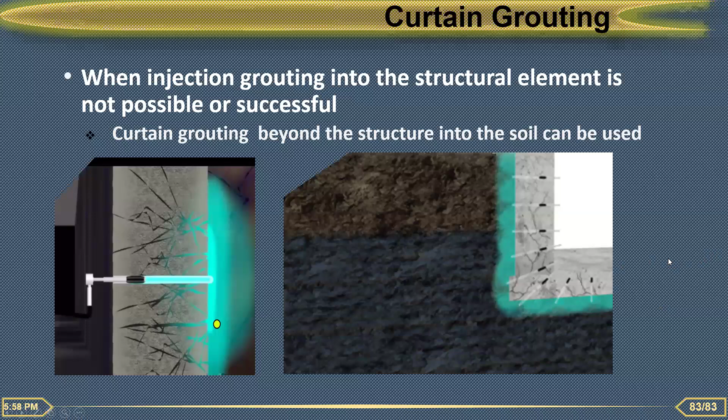So these are all the present day technologies available for leakage treatment and rectification. I will take a few more minutes to give a brief of the handbook published by the Indian Concrete Institute so that you are aware of such facilities available.

It's a first of its kind, the first comprehensive handbook on waterproofing in the country. It is prepared by a technical committee constituted by the Indian Concrete Institute, published in 2021. It is authored by eminent personalities in the field of waterproofing, including manufacturers, applicators, consultants, specifiers, clients, builders, researchers, environmental experts, and safety experts. A wide spectrum of people has contributed to making this book.

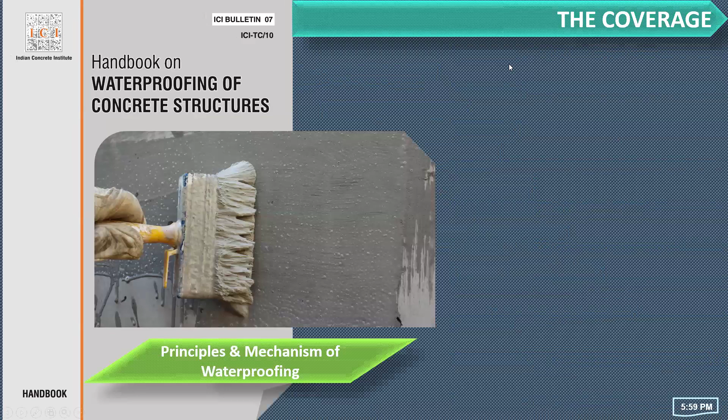It starts with the principles and mechanism of waterproofing, followed by enhancing the performance of concrete against ingress of water. It elaborates various types of waterproofing technologies, materials, application methodologies, with plus points and minus points. First it covers the coatings, different types of coating. Then it covers the liquid applied membrane systems, and it covers the preformed membrane systems in detail.

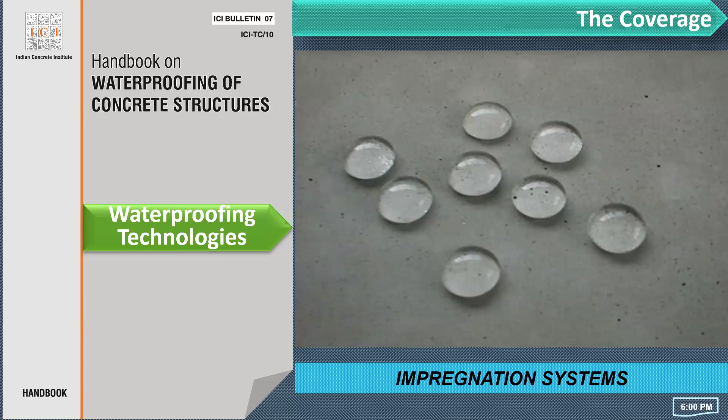It covers the grouting systems in detail, and the impregnation systems of waterproofing. Dedicated chapters are given to all these types of waterproofing technologies. Joint treatments are given a lot of importance, and a full chapter is given for detailing, with a lot of useful sketches for normal construction requirements.

Integrity testing is one of the major gray areas in the construction industry. As I told you, we do not test a completed waterproofing system. This book has an exclusive chapter on how to do integrity testing of installed waterproofing systems.

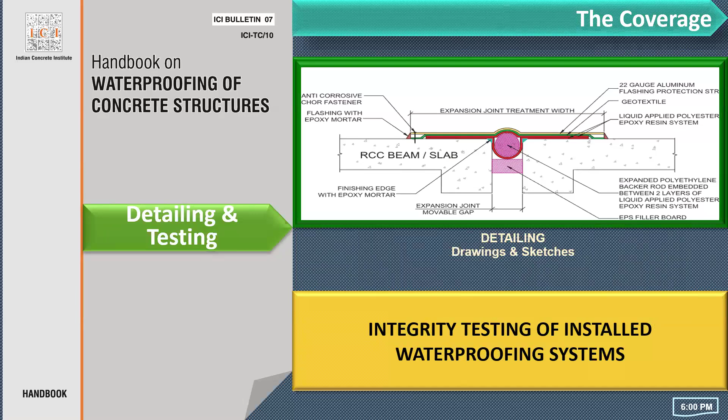A very important chapter content is how to select an appropriate waterproofing system. It gives guidelines. We have got a plethora of systems, materials, and application methodologies, and people get confused. So this chapter gives guidance on how to select an appropriate system. Your success depends on how you match the performance parameters of your product or system with the behavior pattern of your structure. There lies the success. Here we give a lot of guidelines on how to select it.

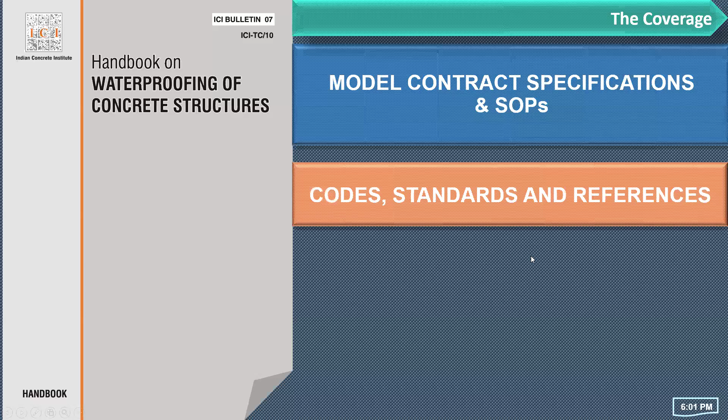Then waterproofing of tunnels is covered. To make it comprehensive, we have given model contract specifications and SOPs. We have also included related codes, standards, and references. Health and safety along with green features are also covered.

So all these contents, all these coverages are covered in 18 chapters. All the aspects related to waterproofing are covered in 18 chapters.

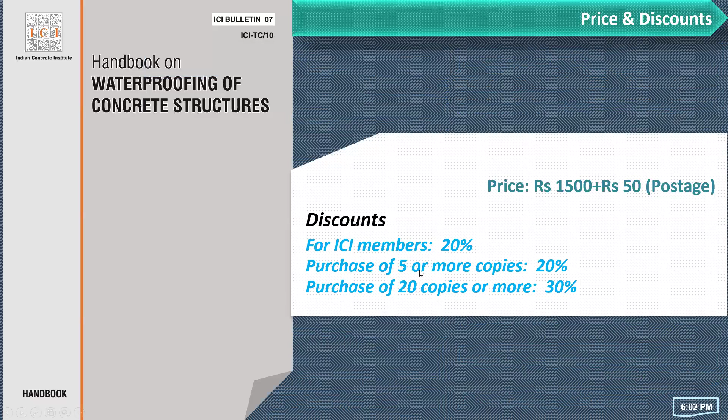Now this is available. The pricing is 1,500 plus rupees, 50 as postage, and there is a bulk discount. If you purchase 5 or more copies, 20% discount. If you purchase 20 or more copies, 30% discount. And purchasing is easy. You can make the payment through the website of the Indian Concrete Institute, or directly through the bank details, or you can even get in touch with the Secretary General to get a copy of this book.